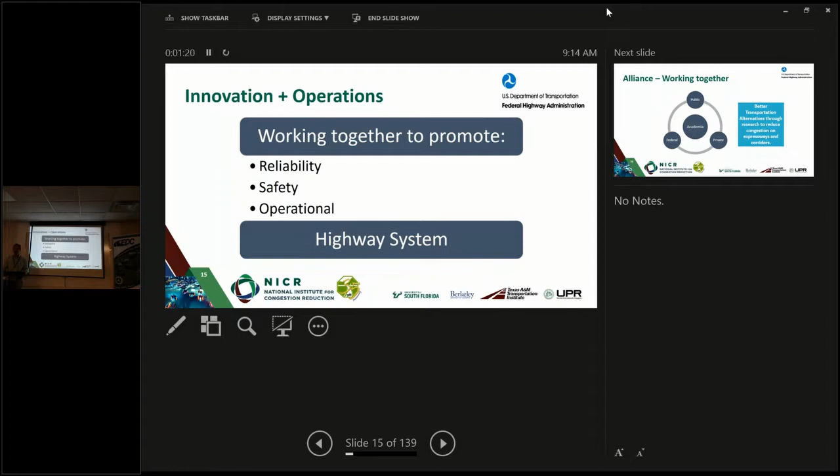Here we have professors from the University of Mayagüez, professors from the University of South Florida, also the executive director from the PRHTA. We have consultants from PRHTA who talk about ITS programs and the different innovations they are deploying, and we have the federal partners. We are working together to look for new alternatives that can help us reduce congestion, especially in the San Juan metropolitan area and also other important areas here in Puerto Rico. Thanks.

In Federal Highway, we have the Everyday Count program. This program is about looking for new innovations every day to implement in the different states to save time, money, and resources. Here in Puerto Rico, as part of Everyday Count 6, Puerto Rico selected two innovations in the operation program: Crowdsourcing for Operations and Next Generation TIM. I'm not going to explain or provide more details about those two innovations because we will have a very good presentation from the PRHTA as part of the agenda. Also, we will have two other presentations about unmanned aerial systems, another very good tool and device that will help us not only in traffic incident management, but also in traffic studies and the evaluation of traffic in our freeways and arterials.

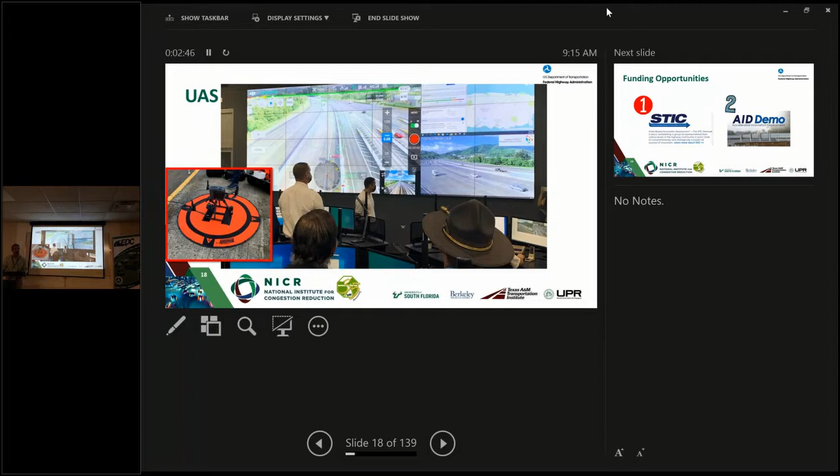Remember that in Federal Highway we have two excellent programs to provide funding. The STIC, State Transportation Innovation Council, provides $100,000 each year for innovation. Puerto Rico Highway Transportation Authority has several projects to acquire different tools, especially in the ITS program, with those funds. The other program is the AID Demo, where we can have up to $1 million every year. So we invite everyone to learn about those two programs and submit different proposals.

Thank you. Now, don't take it personal, but just in case, it's my first outing.

I still love you, okay, good.

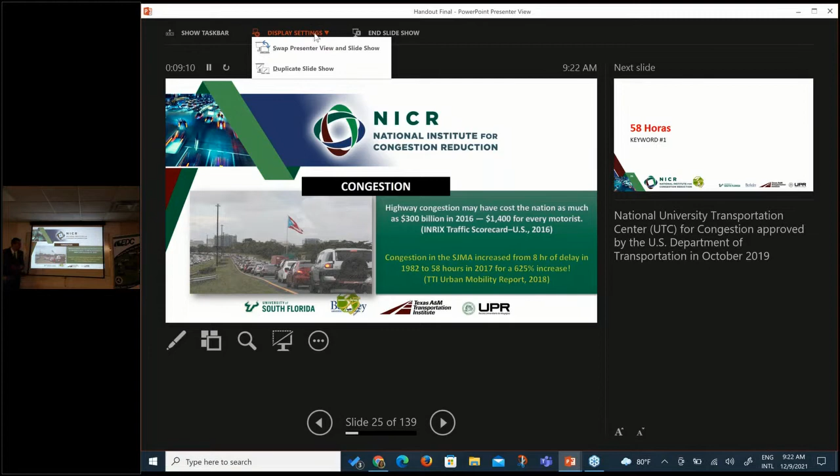Obviously, San Juan metropolitan area is one of the top 25 cities in the country in terms of congestion levels. So if we talk about San Juan, in just a matter of years, from 8 hours of delay that we had on highways back in 1982, right now, in 2017, it's 58 hours.

It's an average per person, hours lost in congestion. When you think about it, it's a huge amount of time that you spend just sitting down in your car waiting for traffic to move.

That's a huge productivity loss that we as a nation have to attend to. It's not a matter of just building more highway lanes; it doesn't work like that. We have 60 years of experience working on this issue. Building more highways doesn't mean congestion goes away, and in some cases it has even worsened in some locations.

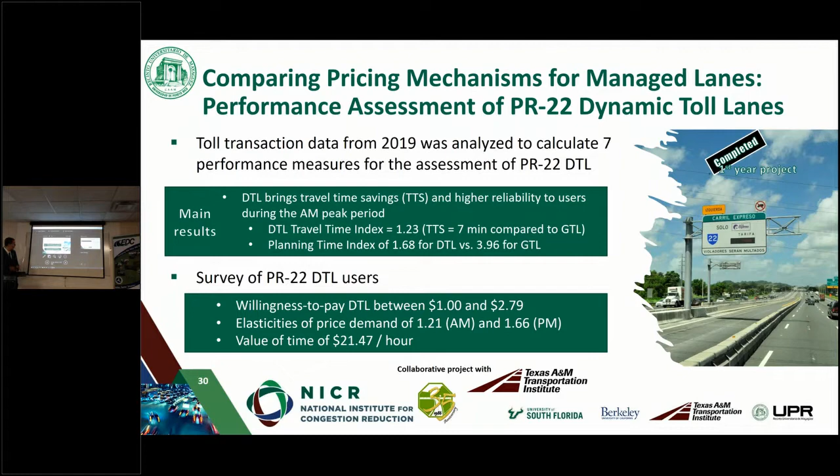One local benefit for Puerto Rico: with that data and those performance measures, we developed a prototype that we think the highway authority or the freeway operator can use to analyze the data. We analyzed travel time index, travel time savings, reliability with the planning time index, and calculated other performance metrics.

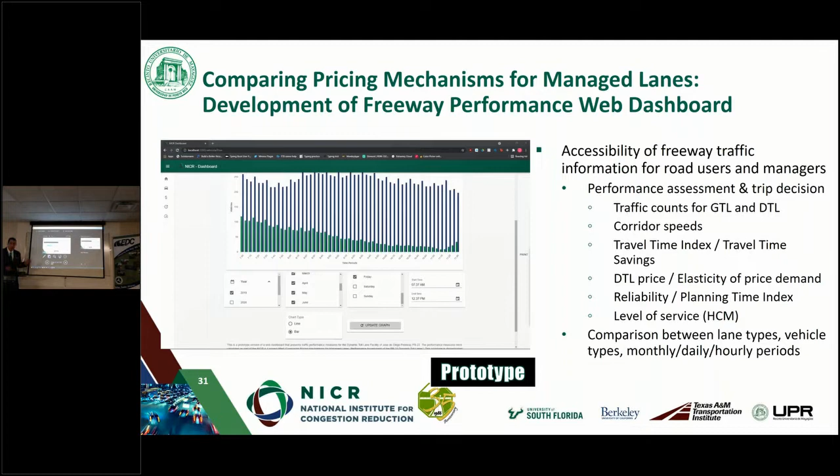This is one of the technological advances you can promote with users or use as an analysis tool, so you can see how traffic is performing on the freeway and try to detect trends that help identify decisions on how to improve the system. This is a demonstration of the tool we developed with students using traffic data from the freeway; they can see trends in traffic speed, number of vehicles, and performance measures in terms of speeds and counts. This can be uploaded online so people on the web can check how the freeway is performing at a given time and make better travel decisions. It's like a mapping application, but with data so you can plan your trip and know the best and worst times. This is one of the products we developed in that project.

We also talked about equity, which is a huge issue right now for our transportation system. We had a project related to the e-scooter system in the city of Mayagüez, and we had access to trip data from the system, which we analyzed to find out who the main users are and what type of trips they are doing.

Very important in that project, we figured out, based on the information, that e-scooters replace some of the trips people do while searching for parking in a university campus. We didn't get to quantify how much reduction was in reality, but we found a trend that people who used to drive their cars to search for parking in the city were using e-scooters instead to make those short trips. That's a huge improvement for congestion in the city.

Another project related to technology, very interesting and important for transit users, is the One Bus Away implementation in Mayagüez. This is an open source application developed by the University of South Florida and implemented in various cities across the world. Now we're working with researchers from University of Puerto Rico Mayagüez and University of South Florida, implementing this as a user tool and also a research tool, because it will help us obtain data from the system, ridership trends, so we can help the system improve their service to users. It's a very useful application.

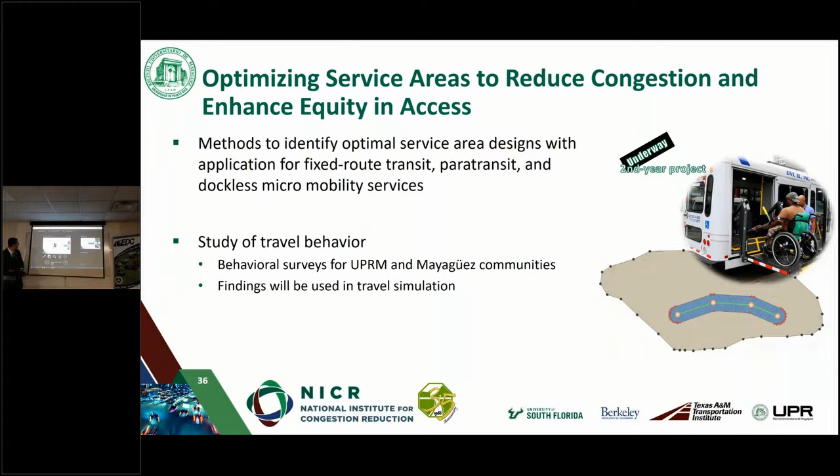The big topic for today is freeway management. We have this project with the University of South Florida, very promising, using new drone technology. You've probably heard about it for inspection of bridges and other infrastructure. Now we're talking about how we can use this technology to improve freeway incident management. This is a new way of using this technology, learning its pros and cons, and how we can improve transportation management in terms of freeway incidents.

You will learn a lot about it this morning.

In conclusion, this is just a glimpse of what NICR is in terms of Puerto Rico and the collaboration. NICR overall has 17 different projects working along these 4 universities, and we are very happy to be able to assist congestion mitigation across the nation. We are a national institute, so we are very happy to be here.

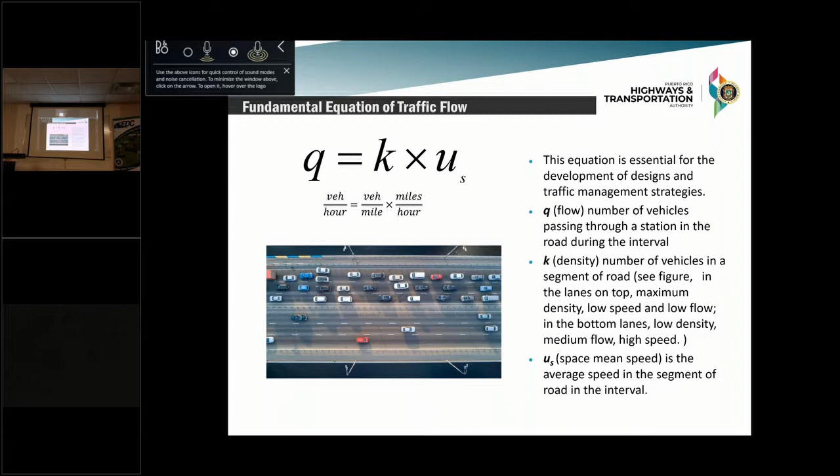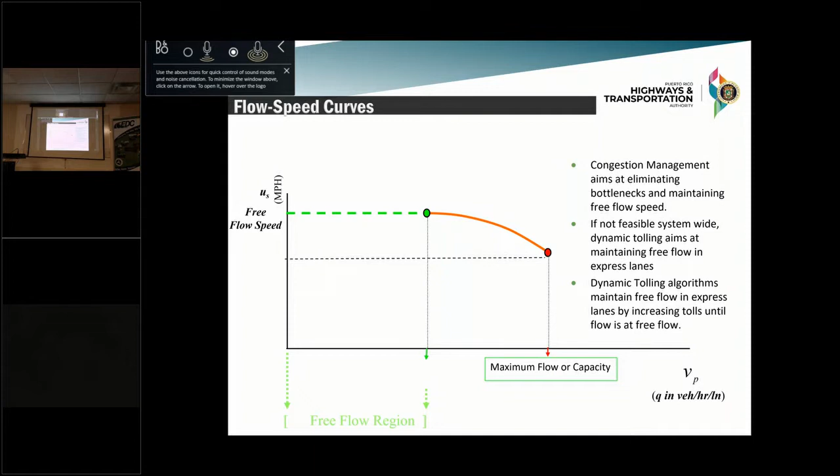So we're always trying, that's what we're trying to do with congestion management, to remain in this green area on the upper left side of the graph, looking at that speed curve, to have that free flow. And once we're reaching that maximum flow, obviously the capacity of the section is compromised.

So traffic flow is directional. There are significant delays in peak period by peak direction, high level of environmental impact, high fuel consumption costs are hampering us, and the dependence on the individual automobile with 1.2 passengers per car on average.

And we cannot look at this as an equation of just adding new lanes and more capacity. Adding lanes is not necessarily the best solution. There are more efficient uses of existing infrastructure, like reversible lanes.

We've been doing it here in Puerto Rico. Changes in the network providing alternative routes. Technological changes like mass transit and bus rapid transit.

So we're not just opening the DTL. Now in December, we're going to be opening a new BRT, a bus rapid transit lane from Caguas to San Juan, to basically help feed the Tren Urbano.

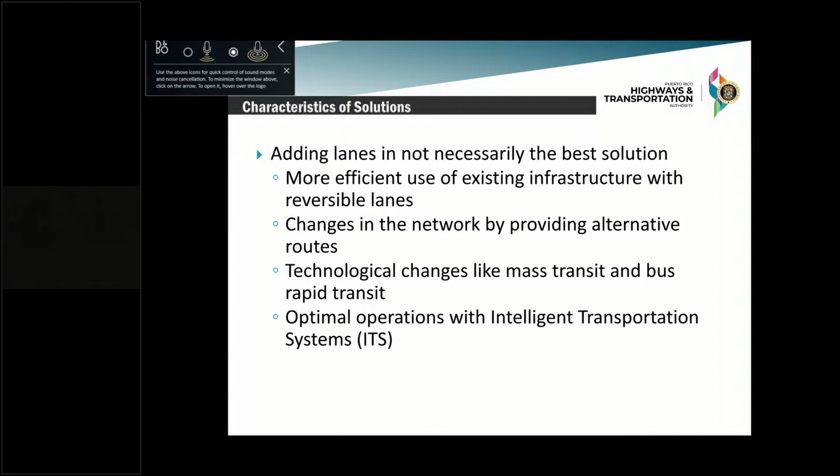And the optimal operations with intelligent transportation systems, like we're doing with the TMC in Caguas. So we started trying to tackle these congestion problems that we have in Puerto Rico with reversible lanes. In PR18, this is when it was basically inaugurated, you can see there brand new equipment at the moment.

And we're looking at additional routes. I find this very interesting because you can see there in green, this is basically PR18 and 52 that we know very well. But back then in the 1990s, there was an idea, and I think there are still conceptual designs here that maybe we can dust off.

It was basically a competing alternative route with PR20, from Kennedy Expressway in PR2 here in San Juan, PR20, and then expanding PR1 to have that kind of parallel corridor to PR52, but that was not pursued later on. It was left with Kennedy Expressway, making it an expressway, and with PR20.

But as I was mentioning, providing additional capacity is not just the solution. There are different ways this has been done, and this ITS is one of those.

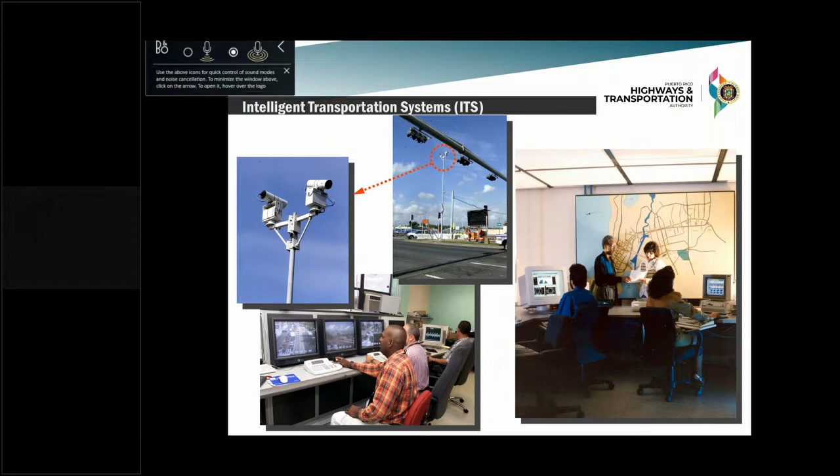So in PR26, the Baldorioty Expressway, most of the folks visiting from the States, this is the roadway you take immediately after you exit Luis Muñoz Marin Airport. I probably arrived through there. So we're maximizing the ITS in this corridor with 26 CCTV cameras, 4 variable message displays, 29 radars, 21 Bluetooth readers, and 1 meteorological station.

This is kind of like the typical messages that you see there. I'm happy to say that we've used it with a

pink alert, similar to an Amber Alert when a kid is kidnapped. In this case, it was a lady that was kidnapped. And I like to say that the ITS system we have in Baldorioty saved her life. Her picture was displayed there. The car, I think, was presumed to be the one she was kidnapped on, and the person that kidnapped her left her very near in Baldorioty. So I like to see this not just for traffic incidents, but it can have a broader impact within society.

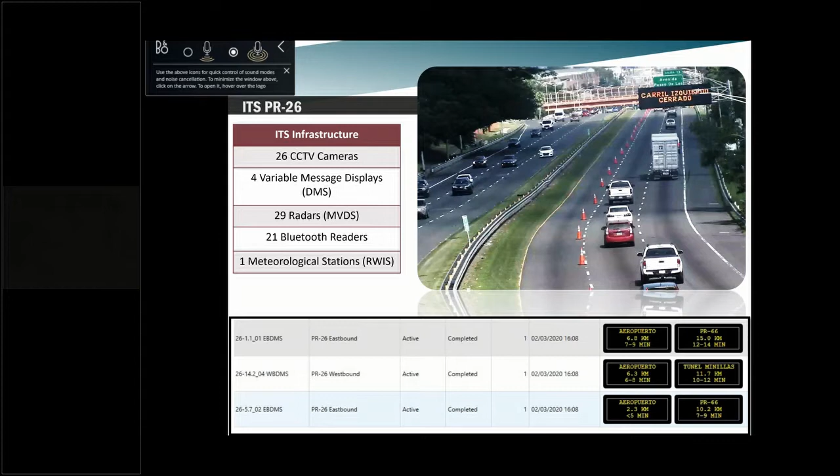Some average speeds of how we've seen the corridor behaving. When we had the reversible lanes, the average speed in the mornings was 35 miles per hour versus PM peak hours looking from San Juan to Caguas, 16 miles per hour. With DTL we see 52 miles per hour. This is the numbers that we have.

I've seen people driving way faster in the DTL, and I take a parenthesis here to always invite folks to drive carefully within the speed limits. We want to avoid all fatalities and car crashes. It's something we should always have in mind.

When we see that improvement from general purpose lanes, 22 miles per hour, once we use the reversible lanes, 35 miles per hour, and then inside the DTL, 52 miles per hour. So we see that improvement, the DTL is providing a definite option for users to arrive faster and safer to their destiny.

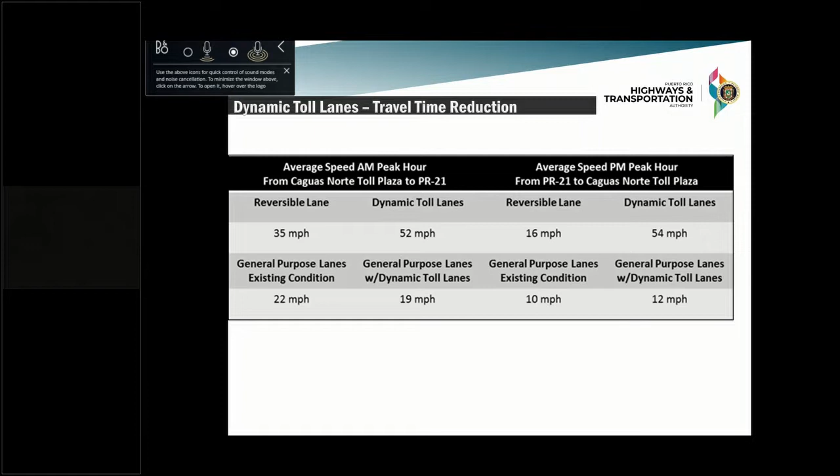There are definitely other options that we're always exploring. We're always trying to invest. We're together with PRITA, the Puerto Rico Integrated Transportation Authority, collaborating with DTOP, like Tren Urbano, the BRT that I mentioned before, the bus feeder system we're trying to create to help increase the usage of Tren Urbano and to ease congestion as other options.

So here in Puerto Rico, we're definitely very car-centric, so we need other options that are reliable for users. The Secretary has several initiatives that should motivate users to

use more of the different public transit systems. For example, she's working on an app so people know when the bus from AMA is arriving to the stop, so they can plan themselves. In 5 minutes the bus will be here because I can see in the app where the bus is, and it's telling me the estimated arrival time. So the confidence level of users can increase, and by connection, the usage of the system will increase.

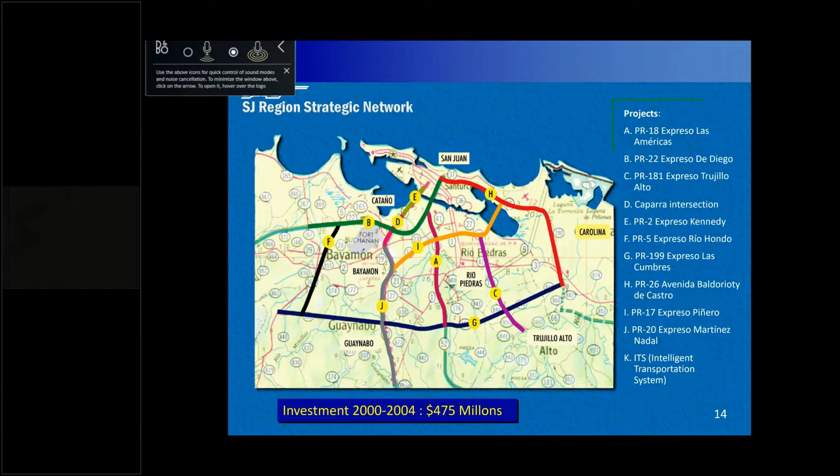So the evolution of the system, as you can see, that $475 million investment, PR20 and PR2, the Kennedy Expressway that I was talking about before. Basically making an express lane on PR2 at Caparra interchange to reduce the PR20 bottleneck, the movable barriers, reversible lanes in Kennedy before expressway conversion, and the Kennedy Expressway becoming a full expressway, and then the improvements to the Caparra interchange.

The DTL in PR22 that Professor Alberto Figueroa was mentioning before, there are some projects that Metropistas is considering performing there at the DTL where it ends in Dorado, extending it to prevent the bottleneck that is currently happening there. So there are some projects that Metropistas is pursuing as well.

PR18 and PR52, as I was mentioning before, we had reversible lanes and movable barriers, and then movable barriers, reversible lanes in PR1 to Caguas Norte, and now the DTL and the projects we're pursuing on extending that DTL to PR30 that I'll talk about later on. It's a very interesting project.

And then the PR26 corridor, in the next slide I'll talk a little bit more about how the projects pursued here definitely helped with congestion. First was the Baldorioty overpasses over Avenida Gobernadores, the Conector 1 and Los Angeles interchanges. Then the conversion of express lane in the North Frontage Road, then movable barriers and reversible lanes, and at the end, the widening to 8 lanes and the improvements to the PR22 interchange.

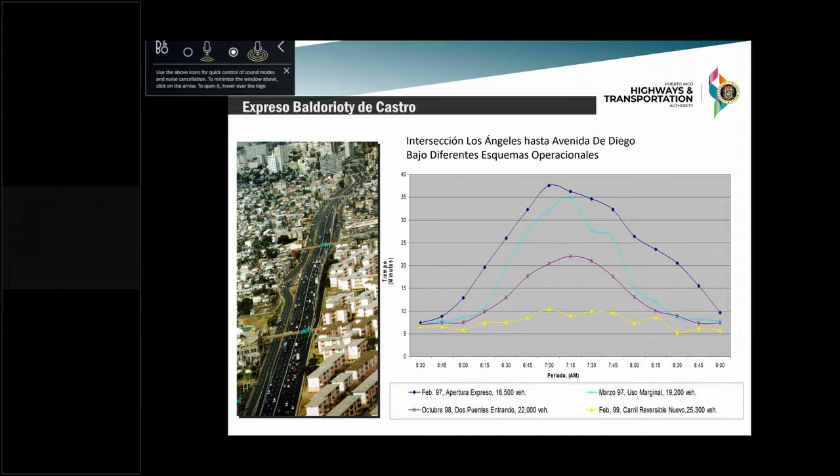And finally, in February of '99, with the reversible lanes, it went down to basically 10 minutes, those peak times between 6:45 and 7:15. So you can see here the different congestion relief approaches and how they improve traffic in this PR26 corridor.

So now looking at the DTL, at the beginning, as I mentioned, there was the construction of 2 reversible lanes, PR18 and PR52. They were used in AM. For folks not from Puerto Rico, from the town of Caguas, the municipality of Caguas, there's a lot of commuters, Caguas and the region of the island, coming to work in San Juan.

So you can see that traffic happening from San Juan, from that region of Caguas, Cidra, Cayey, Caguas, moving in the mornings to San Juan, and then commuting back in the afternoon. So that's basically the behavior of that corridor.

So here we built that DTL with the dynamic toll lanes to provide free flow speeds of 55 miles per hour. The goals were traffic management and reversible lanes using dynamic tolling, maintain free flow, monitor highway with flow, speed, and density sensors to optimize operations in real time.

Something that's meant to make it self-sufficient is something we're still working on. Right now, we're providing the tolls ahead of time, basically with the curves that the engineers are providing. But the idea is to be completely independent with the sensors, and it will be a completely dynamic toll lane as its name provides.

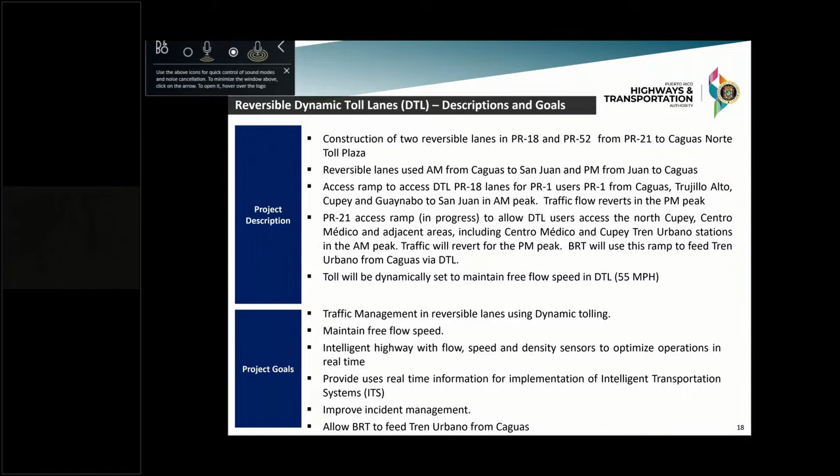We're looking at improving incident management and allowing the BRT, as I was mentioning before, to feed Tren Urbano from Caguas, something that is going to be starting now at the end of December. So this I already talked about.

Well, deployments, it generated 3,200 employees, workers, with 60 million in estimated salaries. It provides strategically located U-turns for first responders to improve incident management.

And also the project line included for the corridor, a section is already worked on, and we're working the last section from, I think, Montellano all the way to Caguas Norte. We're working on that very diligently to turn those lights on by January of 2022.

This is basically a schematic configuration of the DTL. This is the Caguas Norte toll plaza. There's the entrance to the DTL.

Interestingly, I don't know if I have it here, but in the afternoons, once the DTL was opened, there was a weaving that happened in the exit. I think I have it later on, but there was a weaving at the end where the DTL was basically collapsing on Fridays. A lot of folks' behavior using the DTL is very interesting—folks tend to use it more in the afternoons, and it makes sense because maybe in the mornings they're trying to arrive to work, so they can schedule and plan how to arrive.

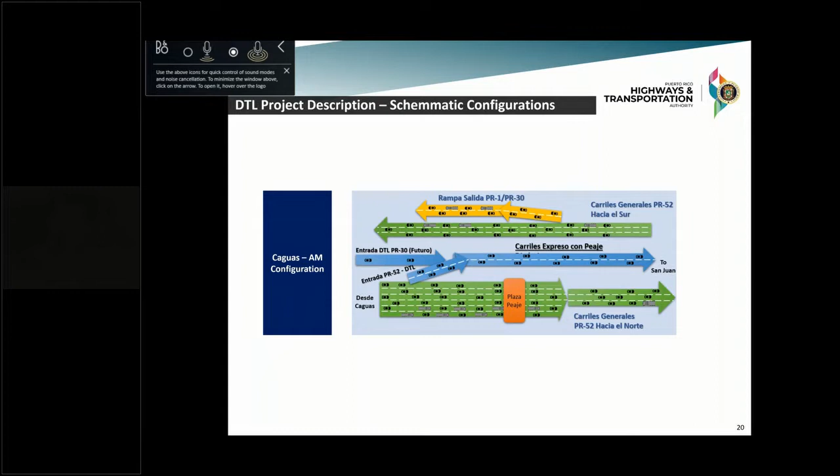So what we did was extend the DTL through that weaving portion of the exit with a reversible lane, and it's been working perfectly as of now, and the DTL doesn't collapse anymore.

This is the configuration in Montehiedras, where in the mornings we're traveling from Caguas to San Juan. There's an exit here in Montehiedras, and then in the afternoons that exit is closed, and folks use it to enter the DTL from Montehiedras to Caguas Norte. This is the configuration in PR18 where the project ends.

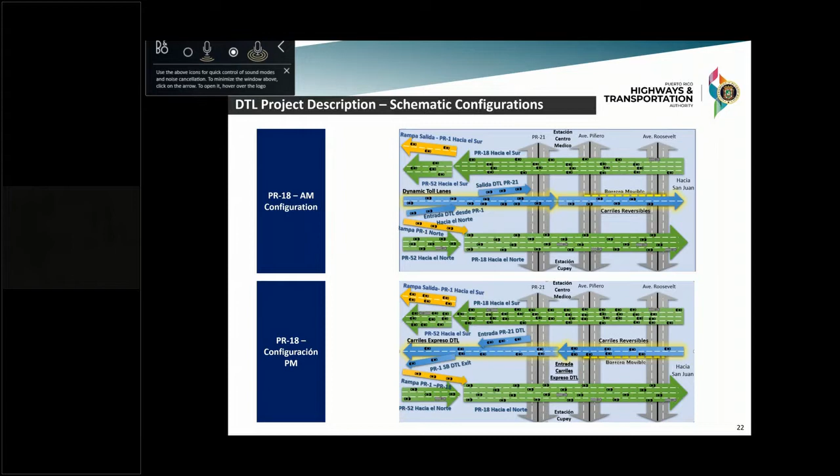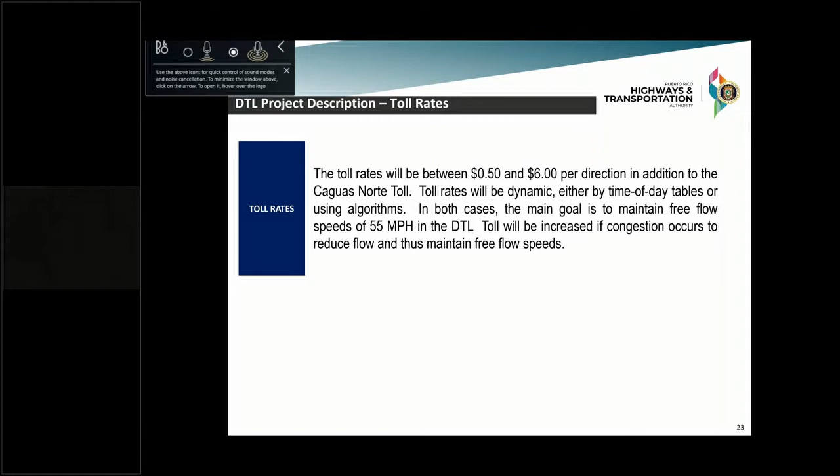Interestingly, right now the maximum toll fee we're charging is $3.50, but the toll rates can be between 50 cents and $6, and the $6 may seem steep. It has a ceiling - it's not like other DTLs we've seen in Virginia that don't have a ceiling. This one has a ceiling, and although $6 might seem very steep, it's there once we have all the capacities to make it fully dynamic. We want to make sure users can have that free flow speed of 55 miles per hour within the DTL.

So as I was mentioning, we're looking at other construction of how to expand the DTL. This is to PR30, a very congested road here in Puerto Rico, basically from where it currently ends in Caguas Norte.

And here we have some schematics of how this will look. There's basically a bi-directional flyover where we have it currently ending here in Caguas Norte. It will go over that flyover to PR30. This is a very congested intersection, with the DTL projecting all the way through to after 203.

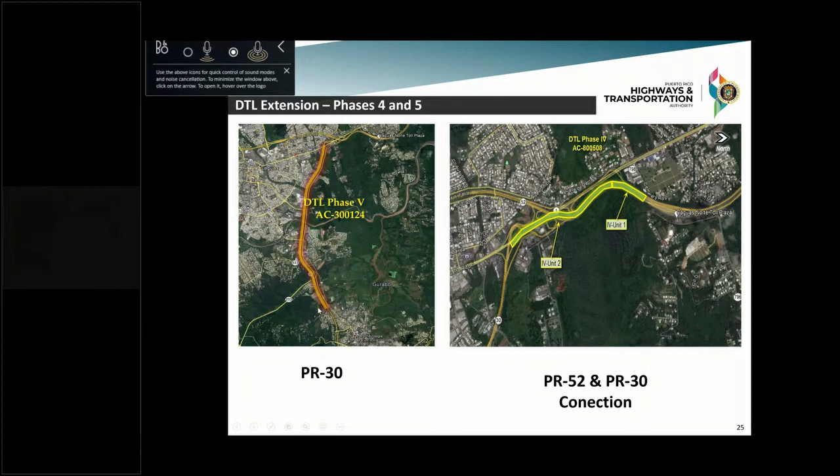So here is the flyover that I was mentioning, providing for new ramps, a new PR1 interchange, and this bi-directional flyover for the DTL. So users of Gurabo and Caguas can benefit from that traffic relief on PR30, which should improve that intersection very much.

This project we're working very diligently to have it up for bid by the second or third trimester of next year, 2022.

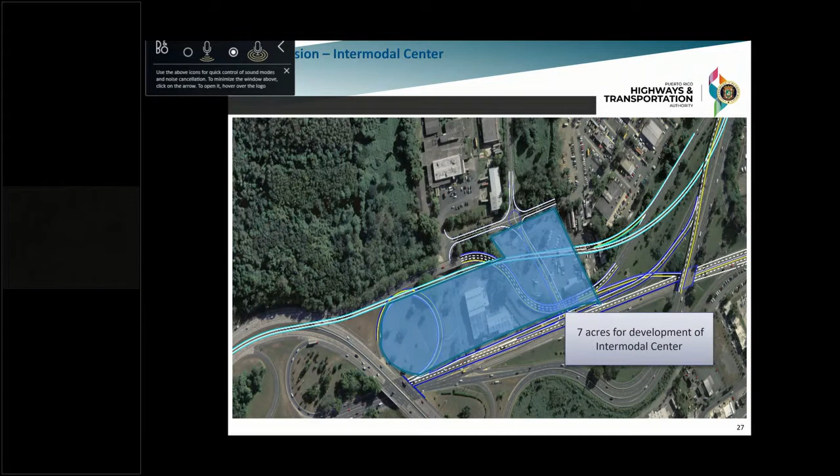It will also include an intermodal center - 7 acres for development, still in the design phase, but looking to create an intersection where folks can leave their cars here in Caguas and go all the way to San Juan, take the Tren Urbano, do their business, and come back, providing congestion relief for PR52.

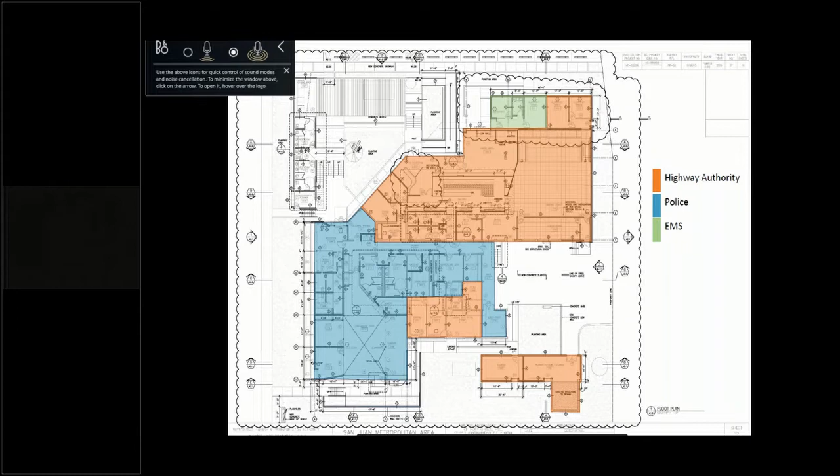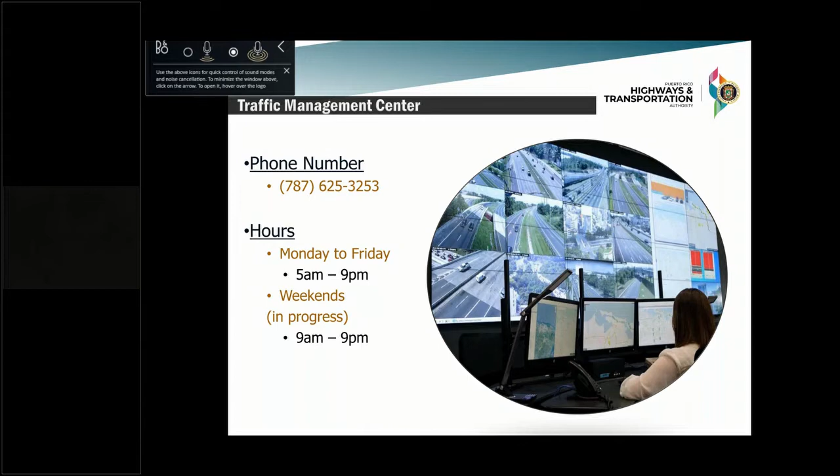I believe folks from the universities are going to be there tomorrow. So looking forward to receiving you guys there tomorrow morning. We have state-of-the-art equipment. All the folks are from the best caliber, and they're working very diligently to prevent accidents by quick responses in the system.

We have in our TMC incident management, travelers information. We collect a lot of data, performance measures, special events management as well, coordination of first responders, the management of Seguro as I mentioned before, and the MOT coordination during construction.

So basically that's the whole system, and it's something that we want to expand beyond the current system. We manage basically the Kennedy, the portion of PR2, the Kennedy Avenue, PR20, PR26, Highway 66 as well, PR18 and a portion of PR52. We're looking at ways of expanding it all the way to Ponce on PR52, so we can have that longer reach to prevent accidents and manage congestion.

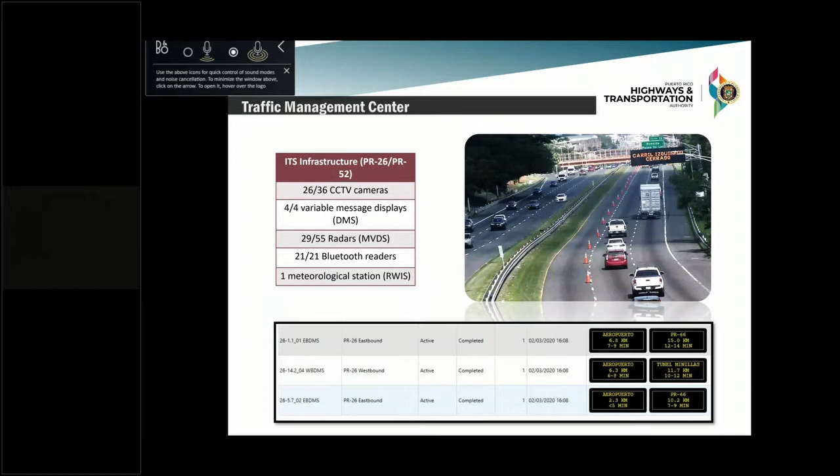So looking at the transportation vision for 2030, the way I see it here, heading PRHTA, this is kind of like a four-way component. We're looking at the emergency reconstruction program. We're still recovering from Irma and Maria. Then we have the regular program with the accelerated highway reconstruction program, the highway congestion relief capacity enhancements. I'm going to be talking about those projects briefly.

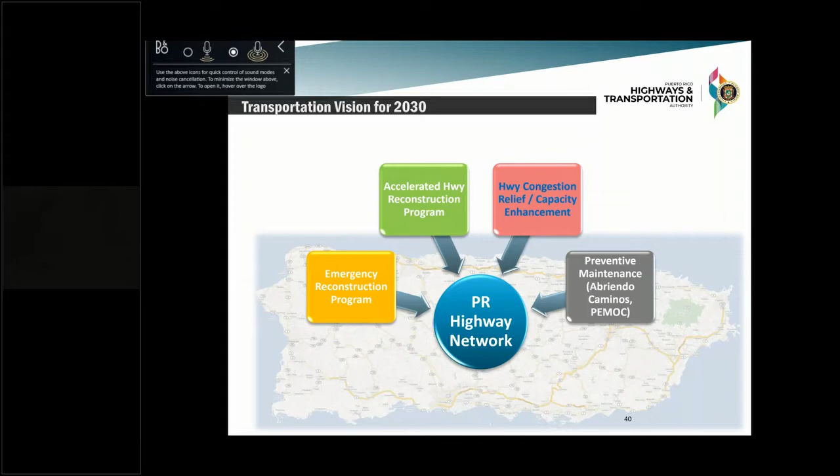And then the latter part of it is the preventive maintenance with Abriendo Caminos and the PEMOC projects. Basically, in this decade, looking from 2021 to 2030, we're looking at an investment of $4.8 billion of federal and state capex monies for the highway reconstruction and the congestion relief.

As I was mentioning, the emergency relief program is a $600 million investment that we're doing, recovering with signage, landslides, and 2022 is going to be highly focused on that. The last two weeks, we received proposals for the bid for the last highway that we need to basically do the illuminations. That's PR53. So we're working on providing all the luminaries that are missing from Irma and Maria, all our highway systems.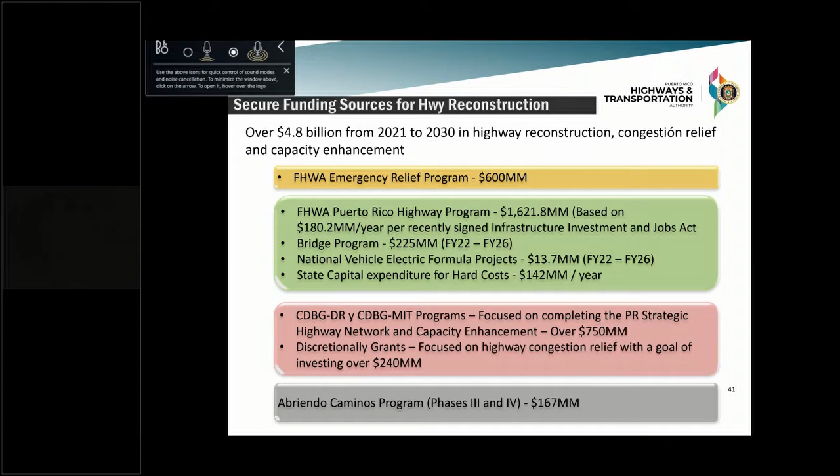Finalizing that connection of PR5 from Bayamon to the Tirantado Bridge in Naranjito, $150 million investment. And starting with the extension of PR22, we're currently doing the EIS, environmental impact statement, to reach our target of late 2023, beginning of 2024, to start that first segment of Atillo with an investment of $250 million. So we have a plethora of projects.

This is the PR10. It's basically, to finalize it, it's in the center of the island. We're looking at basically, this project has 20 bridges. So it's basically bridge sections to finalize this highway. This is going to be a non-tolled highway. The RFQ was published in October of 2021, and currently we are doing the RFC stage in the RFQ process to begin the RFP. It's our target to have it start by the first trimester of 2022.

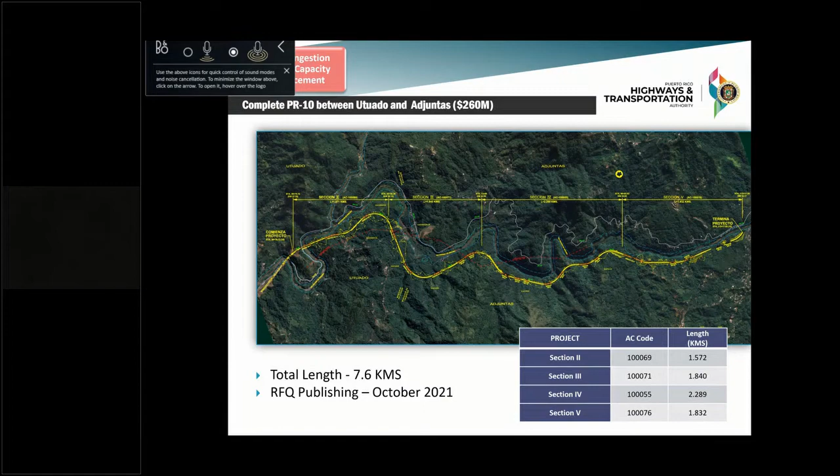This is definitely a congestion relief project. We're working very hard to have this project announced for bid in the first quarter of next year, so basically very soon, since we're already mid-December. But this is a very interesting project.

For the folks that are not familiar, this is the entrance to the UPR, University of Puerto Rico in Mayagüez. We're basically building a flyover for the folks driving through PR2. It touches upon the 102 intersection, the 3108, and closes this intersection in Terrace with a flyover. We're still doing some micro modeling to make sure the roundabouts are not going to collapse and will work efficiently, but we're very optimistic and very advanced on those analyses to have this project built out by the beginning of next year.

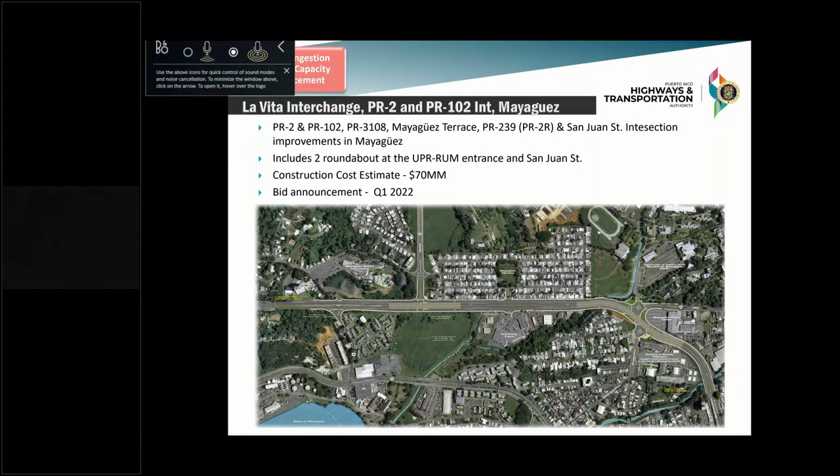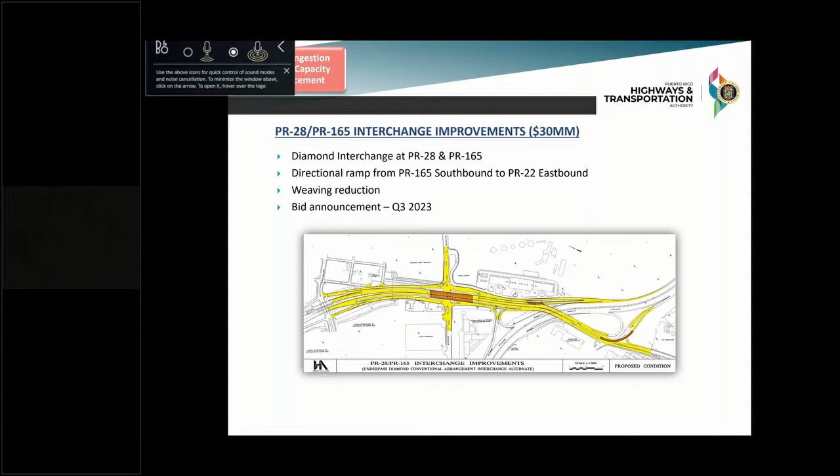We have another congestion relief project at this intersection of PR28 and 165. PR22 Buchanan is the toll plaza down here, and City View Plaza is around here, so there's a weaving that happens here that projects the traffic all the way to 22. This project is going to help very much with that. So we're getting this project ready to be announced in the third quarter of 2023.

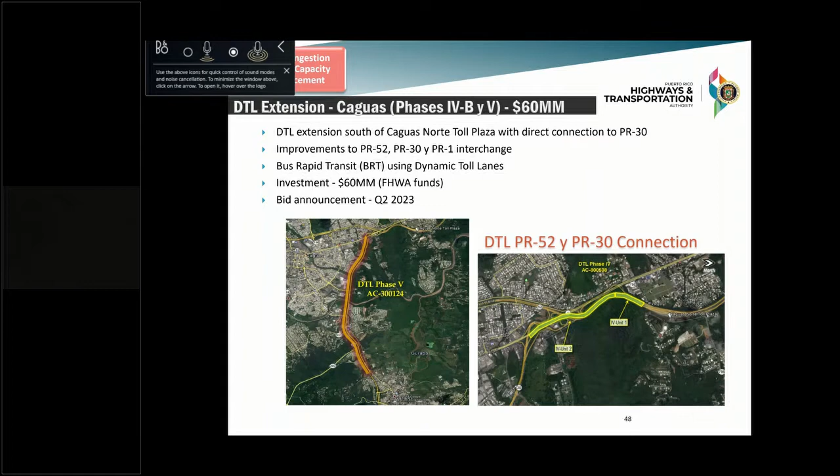I already mentioned about this project, the DTL extension from Caguas Norte to Bravo in PR30.

Last but not least, another very interesting project here in San Juan, the intersection of PR18 with 22 and 17 with 18. Looking at this intersection of PR22, this is where Plaza Las Americas is. There's a weaving that happens here, basically eliminated with a new bridge, another new bridge here, to help with this bottleneck that happens at this intersection. It's a $55 million investment.

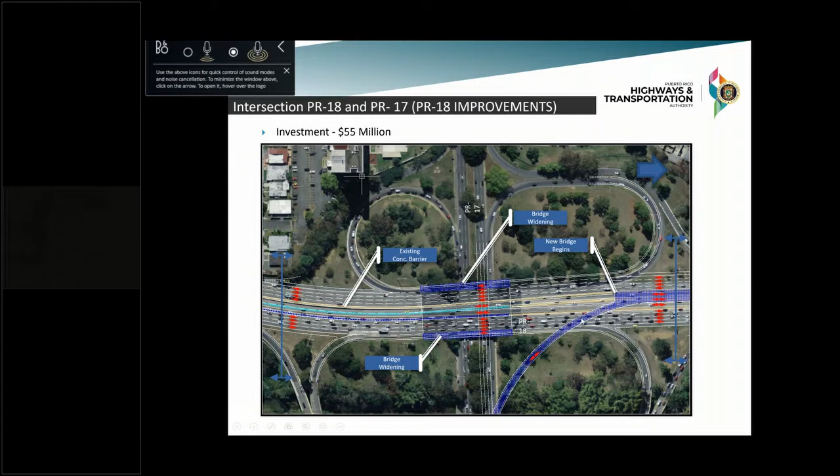Together with that same project, because these are very close intersections, we're looking at launching it in a kind of phased approach, working with Piñero Avenue, PR17, and that intersection with PR18. As we're doing with the DTL in Caguas Norte, we're building a bidirectional flyover, because this ramp from PR17 going up to PR18 has a lot of traffic and basically collapses. So we're working with a bidirectional flyover to increase capacity, while at the same time providing this new bridge to help with the congestion in this section of PR18.

There are other projects that we're working on. This year, one of the achievements we were able to accomplish together with FOMB was explaining to them how we need soft costs to basically put together projects that are shovel ready. As we identify the funding, we have the projects ready to go out for bid, and these are projects we're currently working on to do congestion relief initiatives all across Puerto Rico.

As you can see, we have Congestion Management 9 projects in PR3. We have projects in PR2, La Avenida Corazones in PR114, to do that expressway conversion all the way from Mayagüez to Aguadilla. And last but not least, Congestion Management 14, extending the DTL, not in Caguas, but at the latter end, from where it ends basically to Plaza Las Americas. Together with the projects I mentioned before, they're definitely going to help with that bottleneck happening right now on Piñero Avenue.

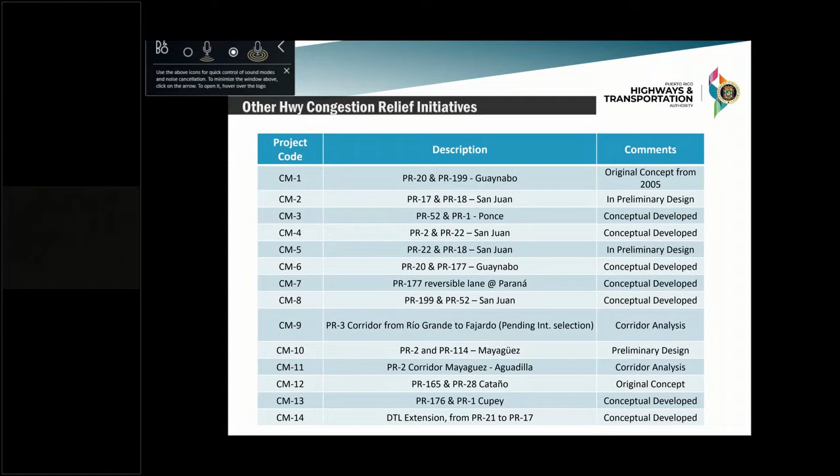So with this, I end my presentation, and thank you all for your attention.

Juan. Alrighty, thank you so much.

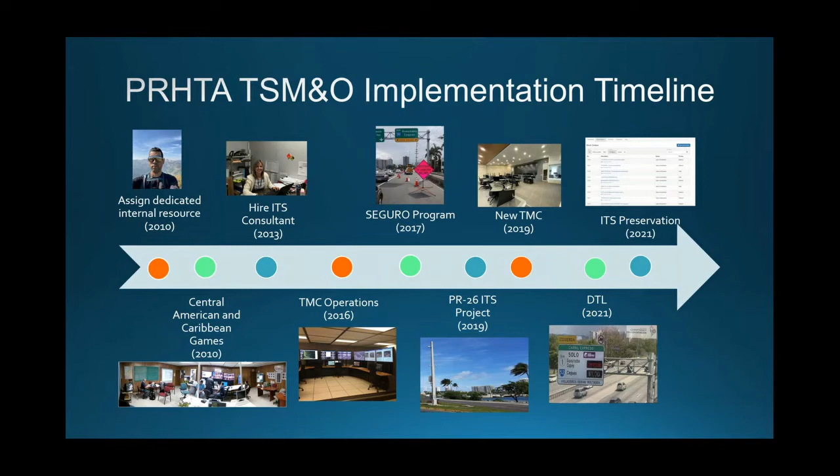Seguro basically consists of units that started with 13 units in 2017 in the main expressways in the San Juan metro area.

As part of the ITS program plan, PRHTA prioritized the ITS deployment within the Seguro area, because these are the expressways and freeways in the San Juan metro area, excluding the PR 22 that is operated and maintained by a private operator. With all this ITS deployment and devices integrated with the TMC, we'll have more information and more tools for incident management and traffic management overall.

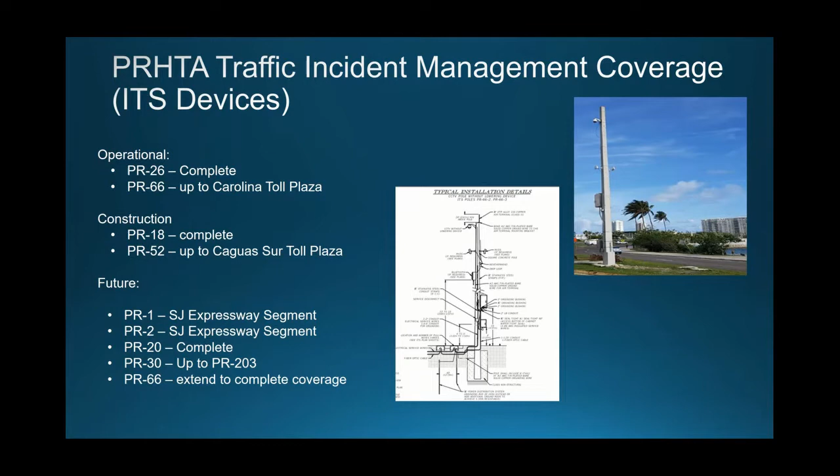In 2019, with the opening of the new TMC, PRHTA was able to obtain SunGuide. SunGuide is the same advanced traveler management software used by Florida as part of their traffic incident management. We use SunGuide to integrate all the ITS devices, and we also integrate Seguro, so we are able to see the location of Seguro and everything else.

They also have SPAR, a mobile application that can be accessed from any cell phone or tablet. Every incident that Seguro assists with, they can create the event, and it's automatically published in SunGuide. So the TMC staff are able to monitor the incident and include more details. When the service patrol creates the event, control passes to the TMC operators, so they can focus on the traffic incident management services.

We collect a lot of data about the incident timeline, response time, clearance time, and roadway clearance time, as well as data about the average service time for disabled vehicle incidents. If there's no need of a tow or private assistance to clear the incident, it's basically faster, but when there is a need of a tow, the time doubles. So there's something we can do about that, and that's what we can do with the data: we can visualize where the problems are and then take decisions with other stakeholders.

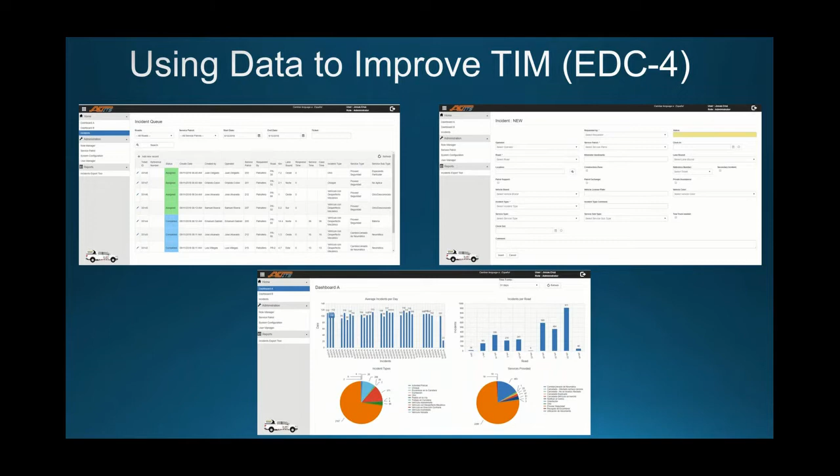This innovation was highlighted in Federal Highway's final report as a success story for the implementation of this initiative, and it was also key in keeping operations going during the impact of Hurricane Maria. Since it was web-based and used cellular phones, they could perform data collection even during those tough times.

Another innovation we performed in the last round of EDC was crowdsourcing for operations. During this implementation, PRHTA executed an agreement with Waze so we could share data with them, combining the incidents they are collecting with the incidents we are also collecting.

We developed protocols so that the TMC operators can use the Waze tools as part of their everyday job, and we also performed the integration between SunGuide and Waze so that incidents managed at the center through SunGuide can be pushed to Waze automatically.

If we didn't have that tool, we would have to wait until the Highway Safety Patrol went and saw the incident and then reported back to the center. So right now we're using Waze for incident detection.

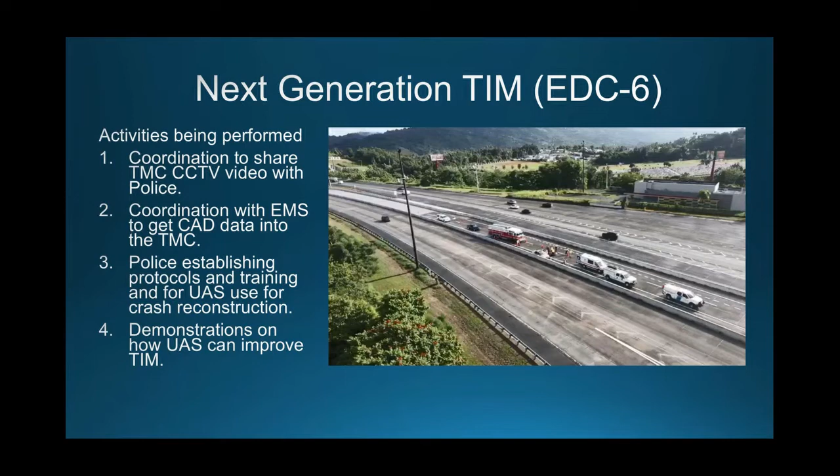Yeah, so with that, I think I am done. I would like to stress the importance of having the university, the DOT, and the private sector collaborate on managing traffic incidents. The importance of teaching students and getting them involved early on with TSMO, the transportation system management and operation concepts, so they are aware that this area of transportation is growing, and there's a need for the workforce of the future and the data we need to analyze and all the components. I really want to stress the importance of involving students and getting them on board with access to this information, tools, and data. So with that, I am done. I think we are leaving questions for later. Thank you all and have a nice day.

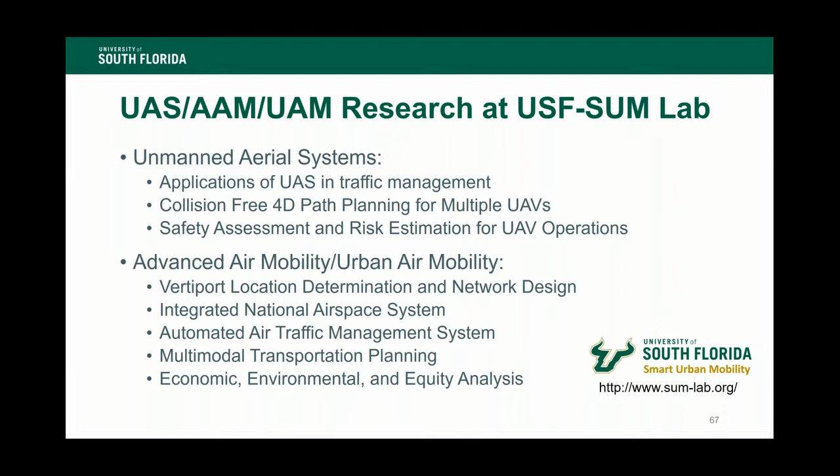I want to acknowledge the team members for this presentation. First is Achilleas Kourtellis, co-PI from the USF side on this project, and he's assistant program director of ITS Traffic Operation Safety at CUTR. Also Mr. Joe Post, a visiting professor of practice, who served as director for system modeling and analysis at FAA, and he's currently on sabbatical at USF. Also Huan Tan, a PhD candidate working with me, and Christina Curry, a master's student from the business school. And we have Brian Porter, whose daily job is at the FDOT District 7 office, and he's a part-time MS student at USF.

In this presentation, since I have limited time, I want to first briefly introduce the unmanned aerial system, our research scope, and the research questions we try to answer. For this study, we have multiple phases—we just finished phase 1 and we're going into phase 2. For phase 1, I will go through the literature review, experiment design, detection algorithm, etc. For phase 2, which is ongoing, we just started, and I want to share some findings and what the next steps will be.

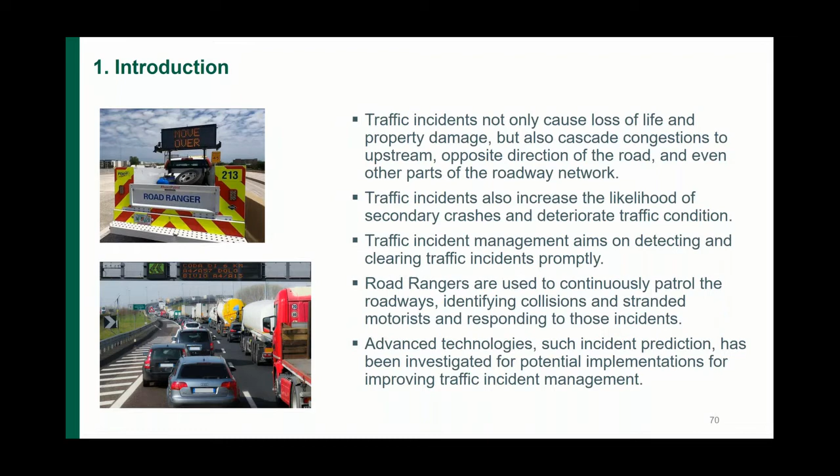For the UAV or UAS, it's including the UAV, unmanned aerial vehicle, sometimes we call it UAS, and also ground-based controller and the system, the communications with the UAV. Sometimes in our study, we also include the sensing equipment that's carried by the UAV. Overall, we call it UAS, Unmanned Aerial System, that can help us perform the tasks we would like to do.

Using this UAS, we can rapidly and autonomously look into large sections of the roadways. It's not a fixed station, but a moving station with different speeds. It could supplement the existing roadside facilities that are available already. It also could play a very key role in areas where we do not have existing infrastructure.

In our study, we look into both RGB sensors and thermal sensors, because thermal sensors sometimes work better during the night, during weather conditions not so suitable for RGBs. In phase 2 of our study, we want to look into real-time automated incident detection, relying on artificial intelligence methodologies.

As I mentioned, this is a collaborative research between USF and the University of Puerto Rico, sponsored by NASA, and it's 2 phases. In phase 1, we focus on selecting and refining image processing algorithms and quantifying the performance of all systems. We look into different parameters to see how the algorithm would work under different combinations of parameters.

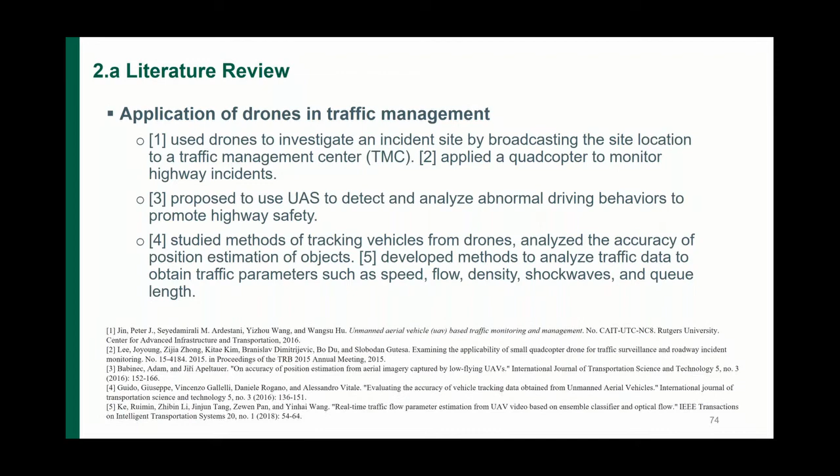I will go through very quickly these literature review outcomes. We did a thorough review of published documents and references, and we summarize application of drones in traffic management, not only incident management, but also monitoring, collecting data, etc. We also look into references comparing RGB and thermal cameras and images, and look into the limitations of RGB and pros and cons of different sensing technologies.

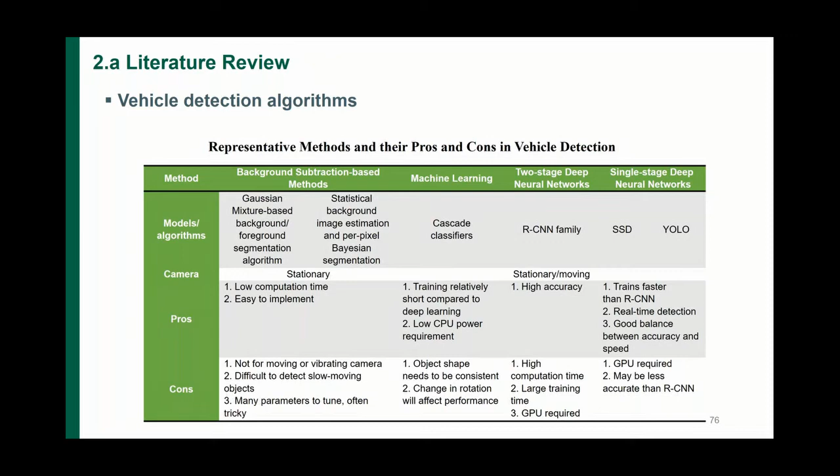Okay, so after summarizing all this literature review, we wanted to come up with experiments for collecting the data, and then we looked into the different parameters. When we look into the UAV, the drone, we want to test the different heights, and we also want to look into the different azimuth angle, and also the depression degree as well.

So we input the frames, and we apply the Gaussian mixture-based background and foreground segmentation algorithm, and then we go to the transformation. Then we do the contour generation, the contour area threshold, and we do the bounding boxes, and we get the data.

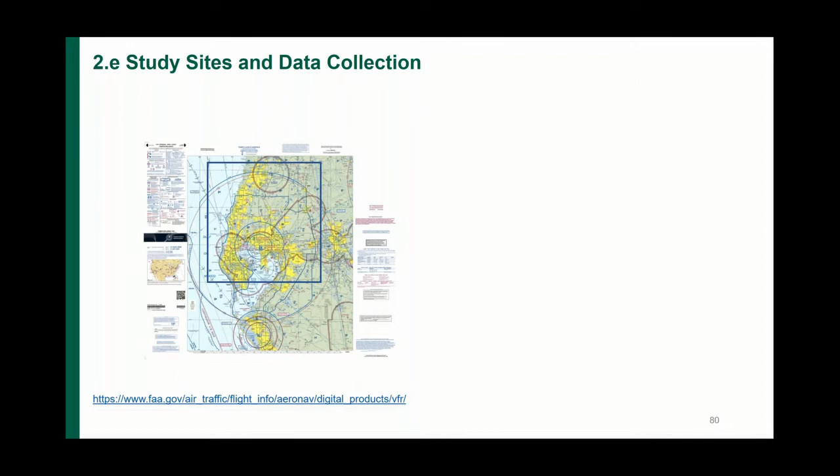So we looked into airspace. We know that in Tampa, we have Tampa International Airport, which is the number 35 airport in the US, and it has a Class B controlled airspace around the airport. That's why we selected one location that's out of that controlled airspace, which is circled red on this map.

And we also looked into historical crash data by Brian Porter and his work at District 7, so he got the data to easily identify freeway sections with high historical crash rates. And then we identified very small freeway segments, because remember here we focused on the stationary data.

So we actually conducted quite a lot of data collection. In phase 1, although our analysis focused on the stationary data collection, we also collected moving station data, with different speeds—5, 10, 15, 20 miles per hour—with different heights, different angles, etc.

So here's some outcomes from our study. We used two sensors: on the top is RGB, and at the bottom is thermal. You see that 50 feet and 100 feet show the different heights of the drones. We also applied the background subtraction-based algorithm, and it shows the green boxes as the detected vehicles.

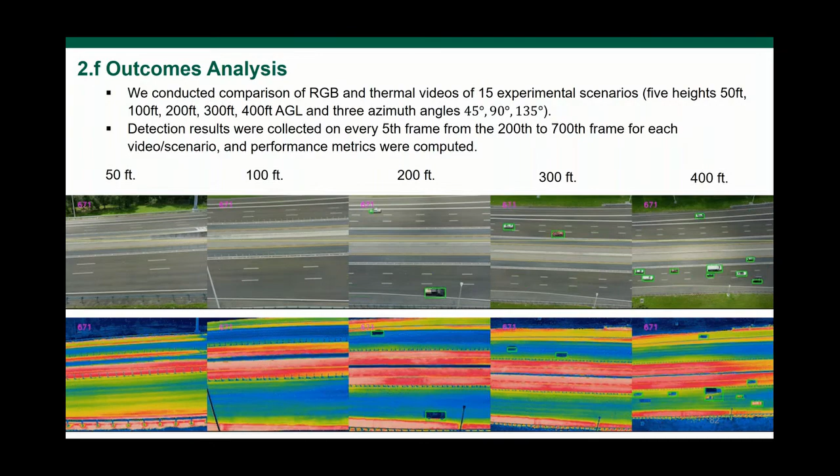As I mentioned, we also put everything into the F1 score and did a histogram, which is easier to understand. For the histogram, this F1 score shows RGB on the top left and infrared, the thermal images, on the right. At the top is southbound, and at the bottom is northbound. So these data show the F1 score, and of course it's better when it gets close to 1.

We find out that most of the time the 50 feet height didn't work very well, and 100, 200, or 300 feet actually works better, even 400 feet. But it also depends on the degree.

There's a green one that shows 45 degrees, blue is 90 degrees, and the yellow one is 135. So we found out that for the 90 degree, most of the time it does not cover a larger area and leads to low performance, especially for the thermal images.

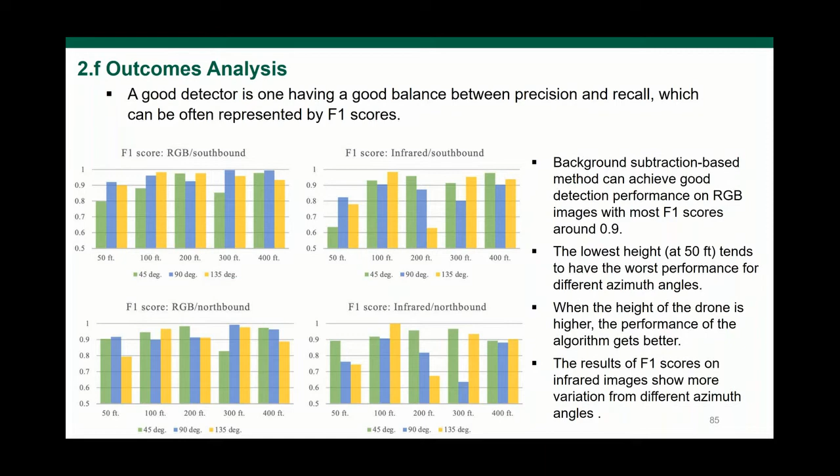Background subtraction-based method can achieve good detection performance on RGB, with most scores around 0.9. But with thermal, it shows more variation from the different azimuth angles.

We found out that the poor performance of the thermal image is because the infrared images are more sensitive to noise, which affects the precision.

To reduce the noise, the threshold on the squared Mahalanobis distance could be increased to improve noisy background, which will improve the precision but inevitably impacts the recall. So we need to achieve a balance between precision and recall so that we can get the best F1 score.

We found out the background subtraction-based method has a potential to outperform the RGB image for the thermal image if the camera is stable with less noise.

We are actually working on minimizing noise, not only just for the background subtraction algorithm, but later I will show we start to look into moving stations. We are developing a learning model.

So this is phase 1. And in phase 2, as I mentioned, we want to look into the automated incident detection algorithm.

From the literature review, we found out that there are two different types. One is microscopic, which is trajectory-based — you need to detect the trajectory of the vehicle first, and then come up with some algorithm to detect the incidents. But there's another type, macroscopic algorithms.

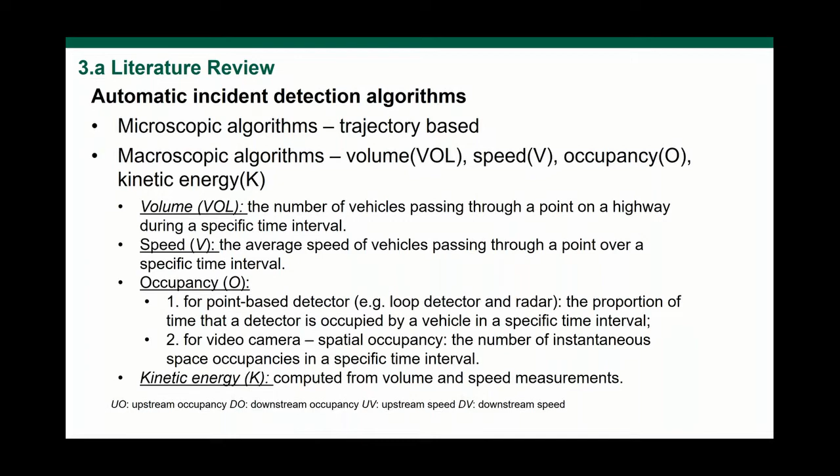We also found out that along all these years, incident detection algorithms actually started in the 1970s. Along all these years, there are different based algorithms. One is pattern recognition based, the representative ones being the California algorithm, or another one is the all-purpose incident detection algorithm.

They use upstream occupancy and downstream occupancy for those algorithms, and they also use upstream speed and downstream speed. Most of the time, they use data from the loop detector.

The second category is catastrophe theory based, and the representative one is the McMaster algorithm. They also use data from the loop detector, using speed, volume, and occupancy, which could be based from just a single detector.

The performance is such that we found it has difficulty with nonlinear data, meaning if you have a lot of stop-and-go traffic, then it's not so easy to detect the status of the traffic and draw conclusions.

The next category is the statistical method, and there are a bunch of them from the 1970s to 1990s, also dependent on loop detector data. Usually this statistical method works better than the pattern recognition-based method, but same thing, it has difficulty with nonlinear data.

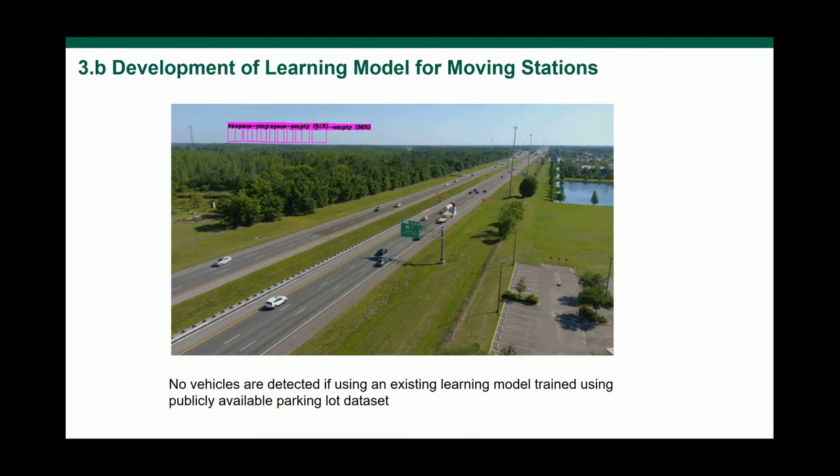In terms of the learning model, firstly we used some available model trained using public available parking lot data, but it didn't work well for our freeway. So then we start to label our frames by ourselves.

After that, we found out that even using RGB labeled data to train the learning model, we can also use that for the thermal image. So the next slide shows the performance of our trained model for detecting vehicles at different heights with different camera angles.

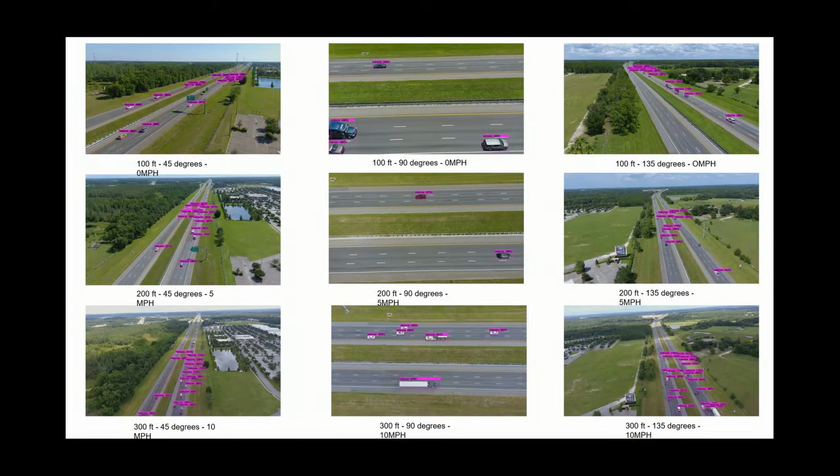And also, this is showing a more congested condition. So we have a drone actually flying along a congested area, and with the trained model, it could detect the vehicles very well.

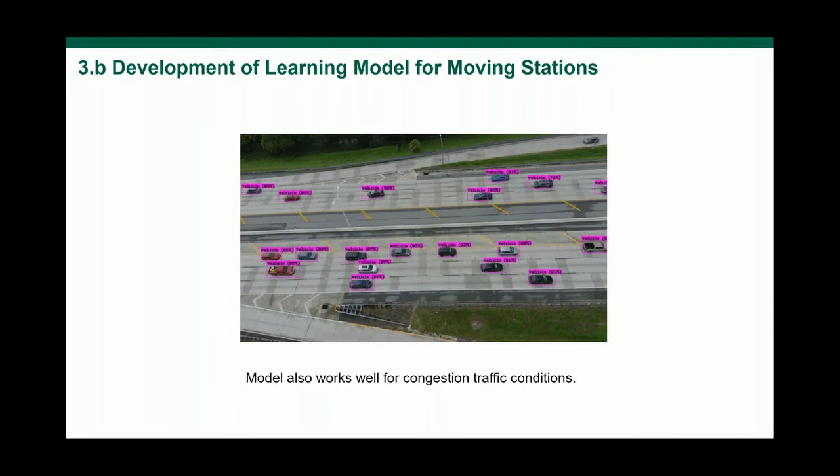So this is still ongoing effort. Our next step is we need to improve our model by labeling more images and also automatically put the bounding box to improve the performance of detection, and also apply the method in the references to distinguish the directions, and then to obtain the other variables that can be used as inputs for the automated incident detection algorithms.

So we are working on that, and we are collaborating with the University of Puerto Rico, and also hopefully to get the help from TMCs, both in Florida as well as in San Juan. Because we want to do the validation as well, we need to obtain the data when incidents occur, and that is pretty challenging. So hopefully we can get the assistance, and we really appreciate that.

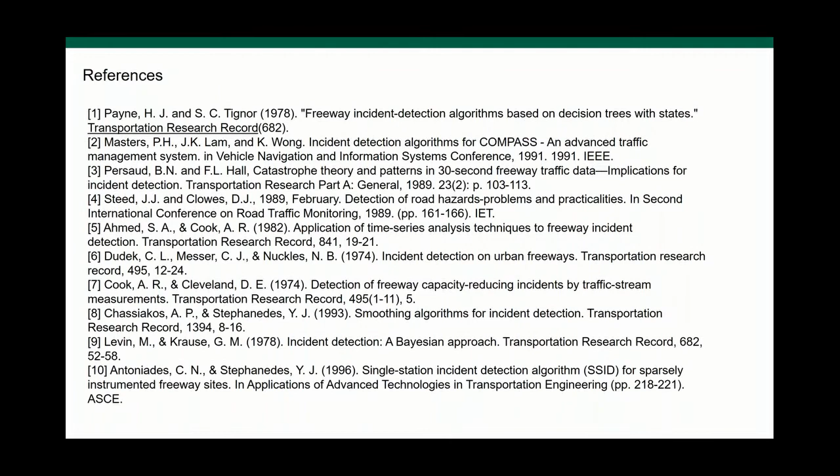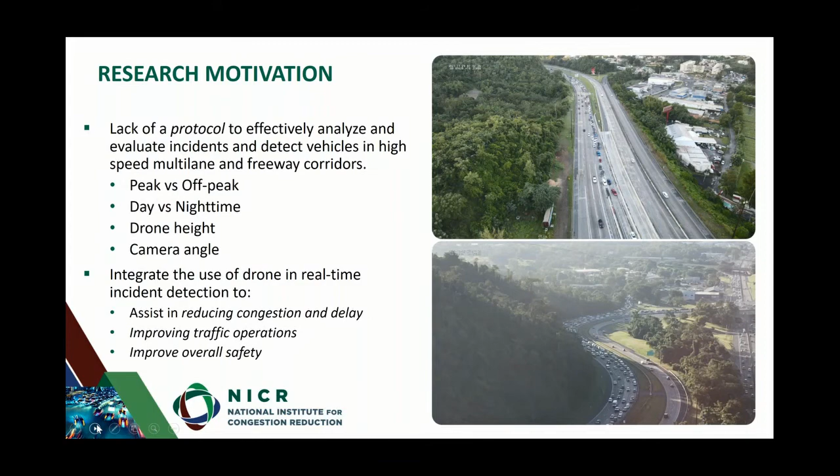We have to design and conduct an experiment, and we're already working on that together. That's where Adrian Gonzalez helped us, establishing standard guidelines for effective and safe use of drones in corridor-wide detection. We need to establish which control variables are most critical.

We need to establish the pertinency associated with weather, since weather is a critical variable—not only daytime, but whether it's raining. We also mentioned that the type of pavement can make a difference, rigid pavement versus flexible pavement.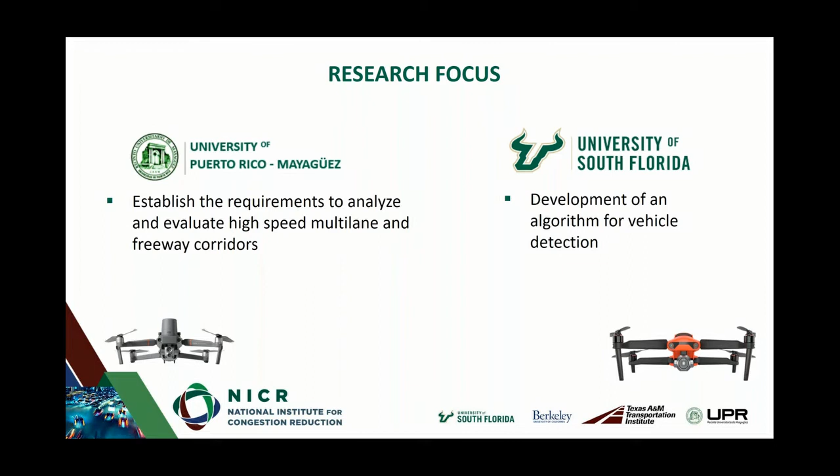Summarizing: we are concentrating on developing the vehicle detection algorithm, and we were concentrated on the protocol for high-speed freeway facilities.

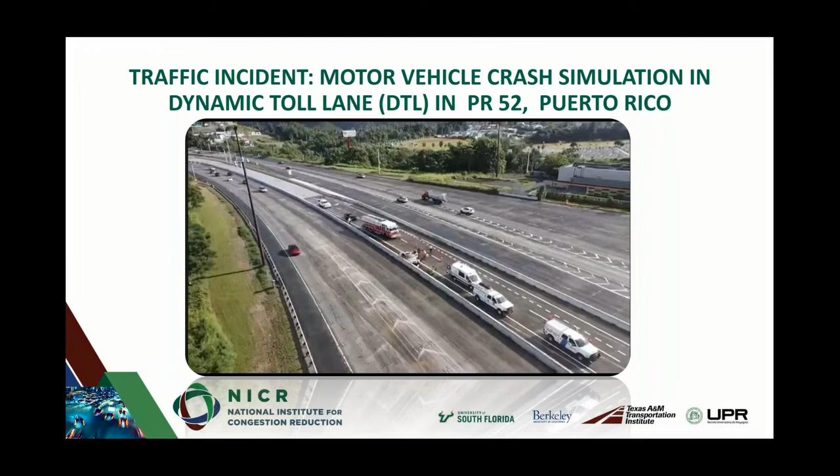Josue mentioned we were there that day, thank you for the invitation, and this is what he was showing—how you address a particular incident. This was a single vehicle incident that impacted the guardrail, and the airbags even deployed. This shows all the logistics involved, and how the TMC provides information so the key players are present to help avoid a secondary crash. That happened two or three weeks ago.

This was inside the TMC, where all of us are going to be here tomorrow. Porter, everyone from South Florida, pay close attention right now. Okay, this is the TMC.

Take a guess—this is the executive director you just met. He was there paying close attention. In my opinion, he was scared to death that we'd have an incident with Colucci and all of us there, but we didn't have one. Thank you very much, trust us, okay?

Then what happened? We have connectivity so the TMC can access seven of the cameras and get the drone's information. We were connected with the drone, and you're seeing what the drone was showing us, and we could give instructions on how to respond at that particular time.

This is our research methodology, because the ABC is part of our methodology. Thank you to Dr. Adrian Gonzalez, the graduate student, for helping put this together. There's a lot of information on how we do this in three steps. I'm going to show the ABC of our research program, split into three areas.

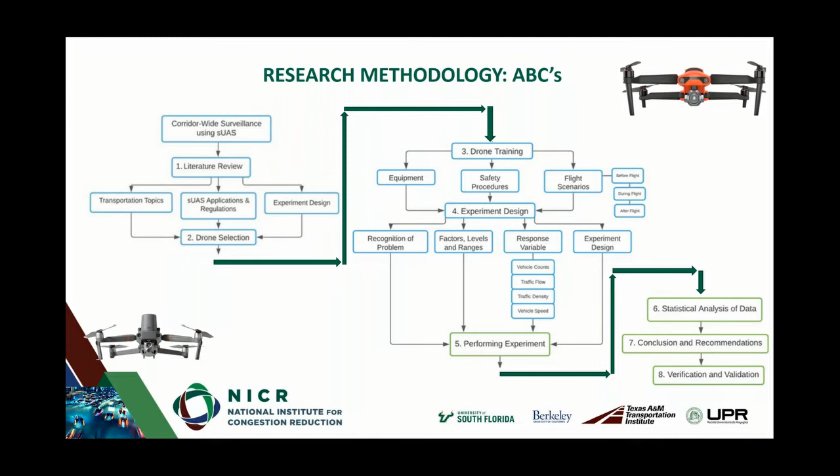That was part A: understanding corridor-wide surveillance using small UAS, with a literature review similar to others—I won't show that here, but keep these areas in mind: pertinent transportation topics associated with congestion, applications and regulations of using drones, FAA and other regulations, and also best practices and experiment design.

And then we had to buy the drones—we didn't have them yet, that was part of our project. Next, we had to do drone training. All of us were learning, took the exam, and then purchased the equipment.

Step number 4 was the experimental design, similar to what Dr. Yuyu showed—drone height, angle, and other considerations. We had to establish our control variables, then started performing the experiment, where we also had to select a test site because we needed to learn. Some of these are the different places we went to learn how to use the drone, what happens, and learn about the thermal image filters of the new drones.

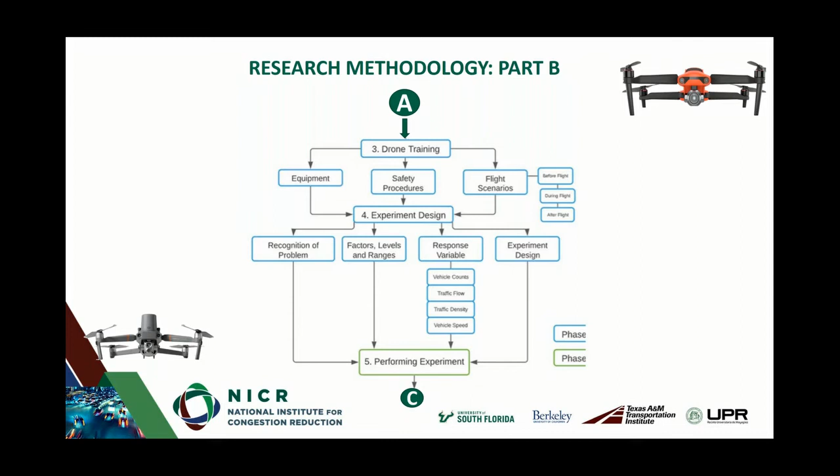Statistical analysis, conclusions and recommendations, and also validation and verification. In this literature review, we concentrated on 4 major areas, including surface transportation topics.

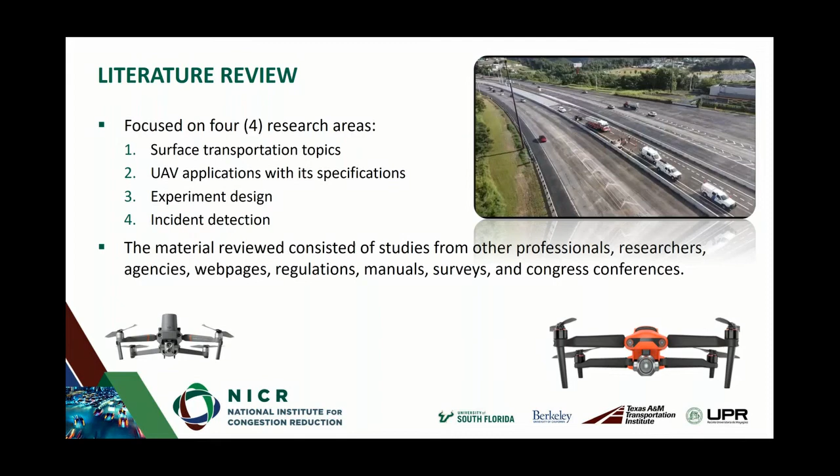We already mentioned UAV application with specifications, experiment design, and incident detection. Next, these were the drones that we purchased. We have 2 drones in this project: the DJI Mavic 2 Enterprise Advanced and the Autel Evo 2 Pro 6K.

As mentioned, we have EDC at the Puerto Rico Local Technical Assistance Program. Since day 1, we have been on the Everyday Counts initiative since 2011, and I also mentioned the Next Generation team. We run a bit of that in our office. I've been there for the last 10 years.

We also have other drones, and we use our students to learn. Brian and Luz, the executive director, went to PR 116. On the microsurfacing project, our students learned a different process.

They went to a parking lot, visited the civil engineering department to learn in the area where we are located, and also practiced in an open field. Different locations helped them understand how to use the drones.

This is the protocol, done in 3 stages as told by the executive director: before, during, and after—very pertinent. We also knew that at the time of purchase, the drones had to be USA manufactured. That was part of the critical issue with purchasing the equipment.

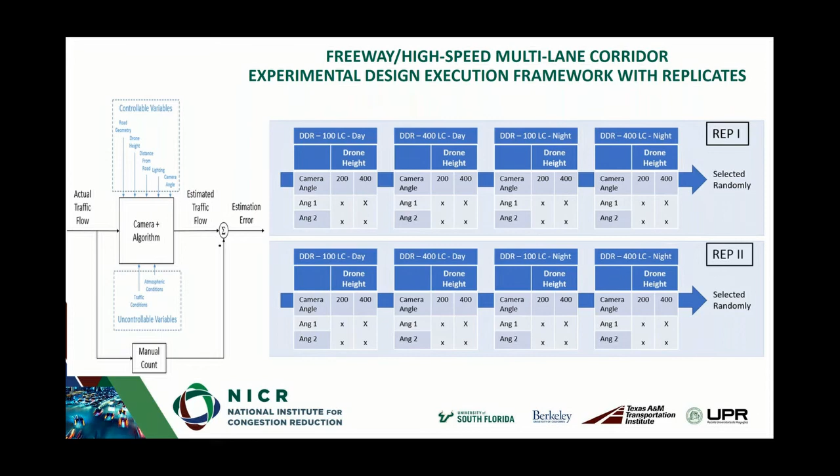This is thank you, Paul. We adjusted your figure. We're giving you credit.

This is the experimental design with the control variables, showing the height above ground, the angle, and understanding the field of view of the lens, and all the other pertinent information of the drone. We're showing the initial condition, distance from the road, because the drone is at one position.

When we had the incident on Monday, November 29th, I had to ask Brian if you can extend the field of view so I can see the length of the queue. He adjusted it in real time so I could see more of the queue in that horizontal curve.

Next one. We did the first experiment on a multi-lane, that's PR2 in Mayagüez. This is the Mayagüez mall. People will be familiar with the intersection of 343, the boundary between Hormigueros and Mayagüez. We evaluated the drone height at 100, 200, and 300 feet, showing the different views at each height.

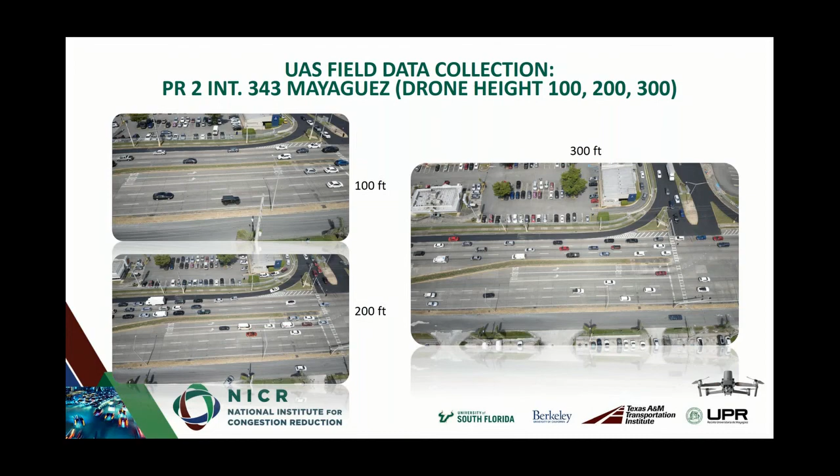We're almost done. We also had to evaluate the different filters, as you mentioned. These are four filters: black hot, iron red, white hot, and fulgurite. What we found was very similar results. There's a lot of noise, and we need to find the adequate algorithm for this trade-off, this balance. We call it balance of interest. There's this trade-off because it's not perfect.

You know that you need the thermal, but you know it's going to be bad. It's going to hit you, a little bit, not a big blow, not a low blow, just a little bit. But 50 feet is not good, it has to be higher, and the angle has to adjust as well.

Next one. Already, this is what we're going to do tomorrow. This is PR52, Caguas North.

Where is the TMC here? Show me, Josué. It should be down here. Down here, right? This is here. This is what we did with our drone.

This shows when Brian and Lucy were there. What day was that? Monday, November 29th, right? You can see that was before. What time did you arrive? 6 o'clock. At what time did you start recording? Recording at 6:30. Okay, this was 6:30 in the morning, Monday, November 29th.

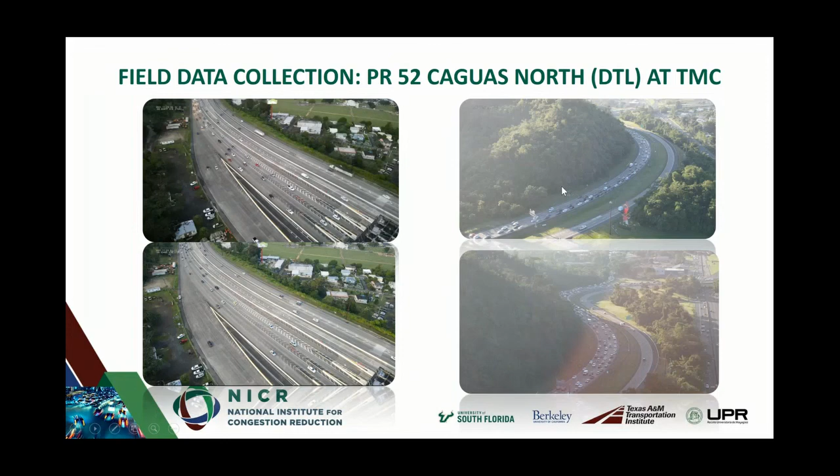Luz? No? Huh? Oh, it was before, that's right. Okay, next. Where is the length of the queue? No, you're going backwards. No, there it is. Okay.

The drone altitude was, like I mentioned, between 200 to 300 feet, because he was changing the altitude. We were located and extended between 1,500 feet to 2,500 feet, that's about half a mile where we were located. We also needed to have the observer so we could see the drone as well.

And the queue - I just want to clarify, Executive Director, we could not see the complete queue. That's one limitation we need to clarify, Didier Valdez. We saw the queue, we know approximately when it finished. We had approximately, with the camera, 1.7 kilometers where we could see the queue.

But what happened? The queue where it started was in front of us, 600 feet, and we already with the camera, we lost those 600 feet, okay? That way we can start, and we have to see higher.

on one lane at that point where we could see the queue, okay? Therefore, keep in mind, already 280 vehicles are on the queue. There were probably, we were talking about 6 trucks at that point.

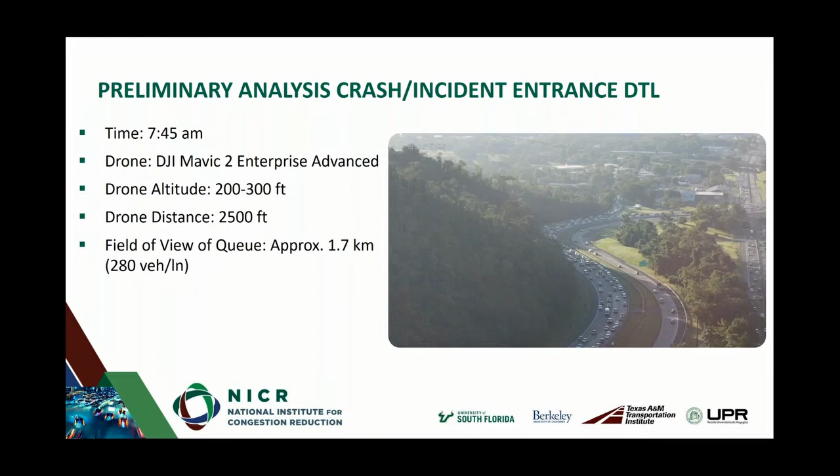Okay, conclusions. We're experiencing and implementing the use of drones for the last 6 years, very impressive. Surface transportation programs in the United States, at one point, 41% of the drones were being used by all state DOTs. Nowadays, all agencies use 100% of the drones, but for different applications, not for traffic incident management.

And one of the potential benefits that has been proven right now is between 40 to 70% improvement in DOT surface transportation activities can be reached using drones. And of course, safety. Safety is also very pertinent.

Productivity data collection combined with improved safety and efficiency, and combined with the protocol and the different levels of data, would be a part of our contribution for understanding the connection with the improved vehicle detection algorithms. Both of our students are working together in that area, and we are helping also to understand the calibration that needs to be done.

And as I mentioned, not only counting, has to be classification. Therefore, to finish, UAS application for freeway and vehicle incident detection in freeways can be enhanced with any spatial coordinates, taking advantage of contour, dense GIS features, 3D models, video images, as these emerging technologies will help us together. And I'm done already, and we're constantly calibrating our protocol.

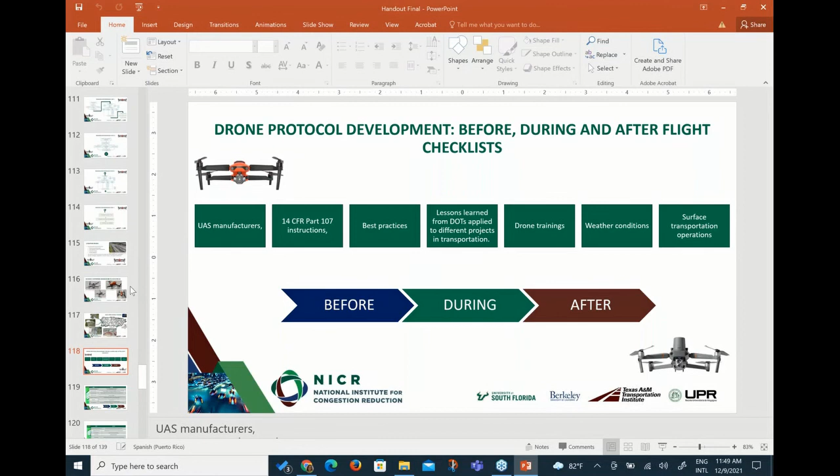I think in our data set, eventually we want to make the data set publicly accessible, because this is NICR, this is USDOT, UTC sponsored, with federal money. So we're going to make it public accessible, and you will see data showing when it was collected, where it was collected, and the details of the data. So for anybody who's interested, feel free to contact me.

What we have done now, because this is a research process, we keep collecting like a 2 minute-ish video with different parameters. So we collect one, bring the drone down, adjust something, collect again, etc. And we change the battery if the first, second, or third one dies.

But in the future we could imagine sending out a bunch of drones. We are looking into multiple drones, how we can apply them for monitoring and data collection, and also automated incident detection algorithms. So in the future it could be a bunch of drones in the air, and the battery could be an issue, but I think battery technology will improve.